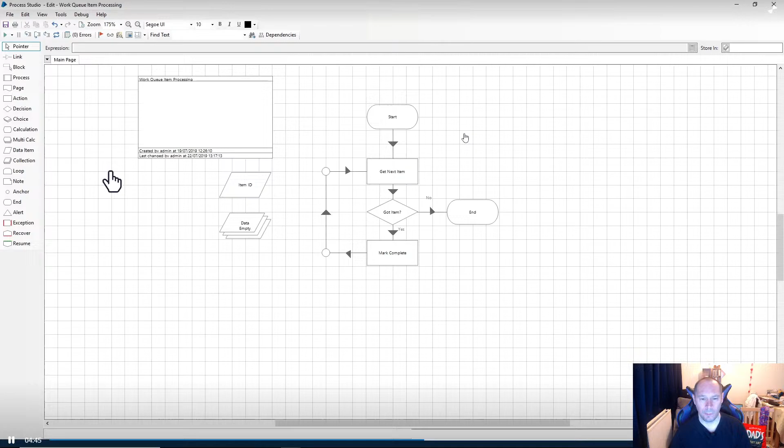Next, you will modify the work queue item processing process to work the new items in your work queue and mark the items as either complete or as exceptions.

In this activity, the exceptions will be business exceptions, as some decision logic will need to be constructed around the full-time flag value in the data collection, with full-time being marked as complete and part-time being marked as exceptions. Remember to use dot notation when using collections in expressions. Save and run.

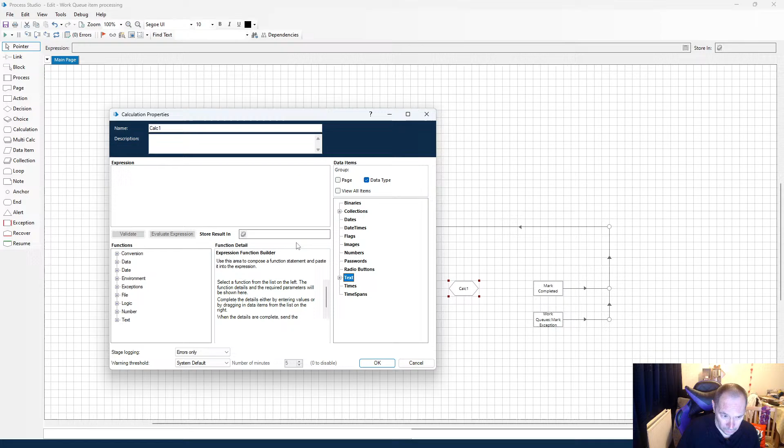Calculation stage and a data item. So I think you only need to populate the one and then we can copy the other, that's basically what that is. It's going to be the dot notation thing again, isn't it? The calculation stage will...

There you go. Update summary field: this item was processed at, and now. So that is just text. Not quite sure why there's a space there, but, and now.

So calculation, update summary field. No, it's not, it's a capture now.

Capture time, I'm going to put capture time just because if somebody else was looking at it. Capture time, item was processed. Then it's... what did they put? This item has been processed at. So I'm not going to bother with that, I'm just going to put item processed at.

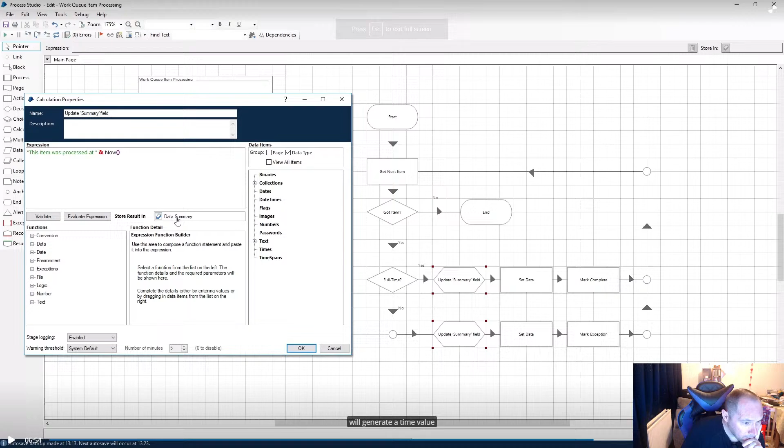Store results in. Really? You're not going to let me store one? Why? Why are you not going to let me store? I don't need you because you're doing nothing. And now that's storing in data.summary.

But where is my data.summary there? Ah, I wonder if it's just a drag there. I wonder if you do that. Where's that coming from? Data, no, it's not that. Collections data dot summary.

Cannot create data stage with the chosen name. Data item must not contain the full stop character. Data summary, there we go.

Okay, so what would that give? The expression, so item process, there you go. So that's the result, okay, so that is working. Fairy schnuff, so that's fine.

Generate a time value and store it in the summary field in the collection. Hang on, action stage. Data, see, no, so that didn't work for me I don't think. The calculation stage. See, generate data.summary and store it in the summary field in the collection. Yeah, so in the collection. So why didn't that do that for me?

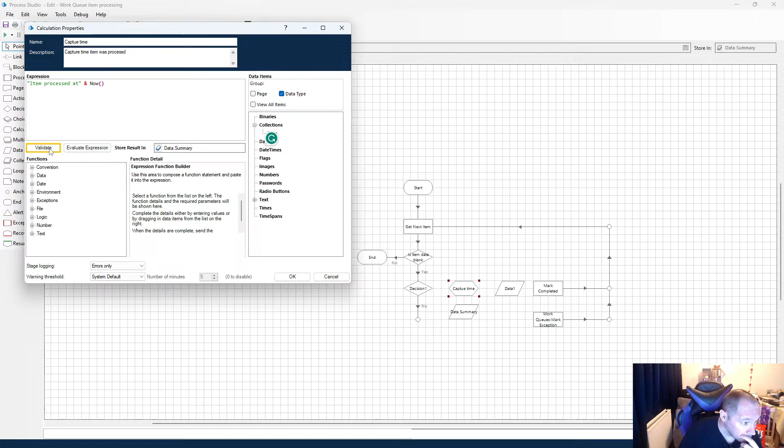So if we got here, so capture here. So if we get rid of this and go to the collection, data dot summary. What? So I just did that and it says you can't do a full stop. Like, what the fudge?

So now I'm going to copy that, so let me just delete that data summary there, so I can copy that, paste that into there, because that's basically the same thing, you know what I mean? So now we can link that into there and that into there, because that is the same thing.

And I think this data item here, its data type is a date and time, and is coming from... it's coming from data type. So where's my input here? Initial value is... can I see, how do I just drag the data dot summary now? Reset initial value, current value.

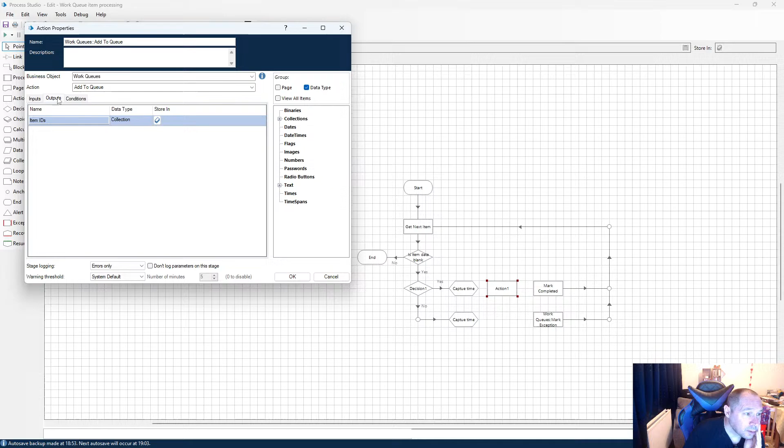Ooh, excuse me, let's have a look. Updates are saved back to the work queue. Whoa, I missed that.

The action stage will ensure that these item updates are saved back to the work queue. The set, so data and item data action, it's set data, look. The work queue's business object will save each update of the collection back to the work queue.

Set data, so update field, set data. Business object will save so data and item data. See, do you know what? Let's have a look, so I don't know.

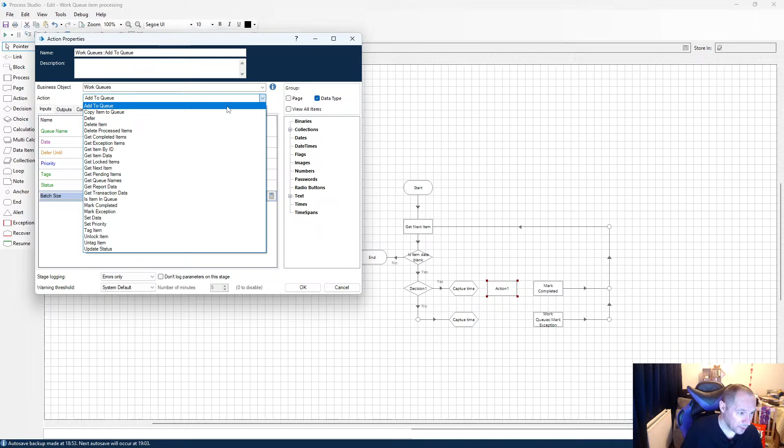So action was update the work queue, wasn't it? So it was a work queue, and then it was update status, and then it was item ID? Yes, it was just item ID, wasn't it? Done. So if we do that, paste that, because it's updating the same thing. There's no point in reinventing the wheel there.

Of course it does, because it uploads to the data, that's where it's going, data.summary. So that's how it knows the field that it's updating.

Within the collections, god dang it. That is not necessarily clunky, but that isn't intuitive at all, I don't think. Save each update of the collection back to the work queue.

How you doing, G? Good to see you, brother.

That is clunky, man. After running the process, these updates will be visible in the session log. Where? Update summary field, ah, there you go. Well, there's only one way to do it, isn't there?

Let's have a look, I don't think there is. Damn, that's harsh. So let's reset that. Let's run. If you go straight to no, I'm going to be a stinker. Here we go, so let's see if it works.

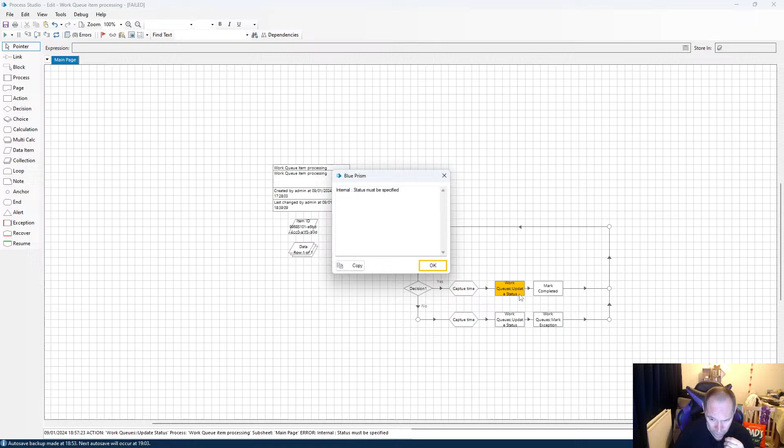Internal status must be specified. So my internal is wrong. So my internal is...

What did I do wrong? Clearly I've done something wrong there. Damn it!

Data, where's this data coming from? Data and item, so where's the data coming from? Data and item ID, where's the data coming from? Because that's not what we're setting, and we're definitely not setting that here.

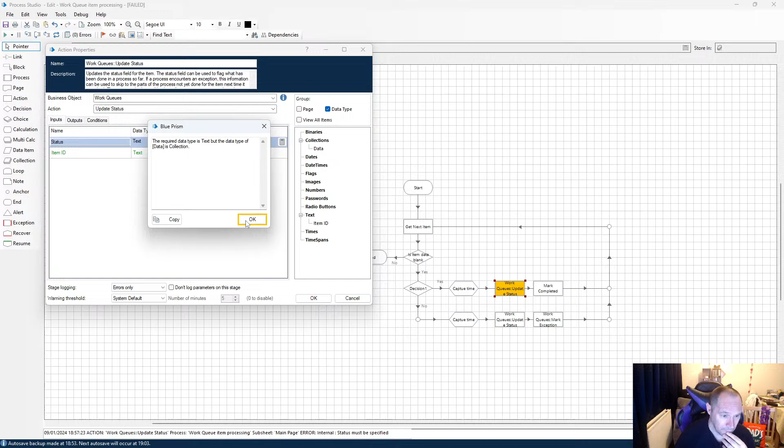Oh, now it works, god dang it. Out of the way, Grammarly. Because that's not going to get old.

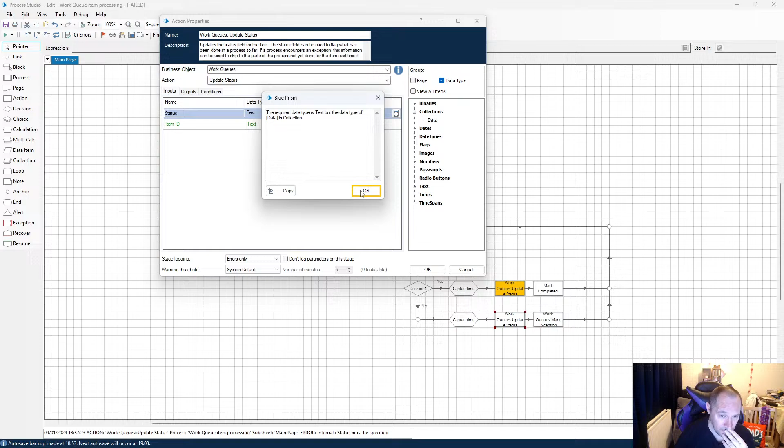The required data is text, but the data type of the data is collection. Oh, is that changed up here then? Did she change that in here? She has, look. Oh, you tart.

And it's there telling me as well, that's the worst thing about it. It's absolutely telling me.

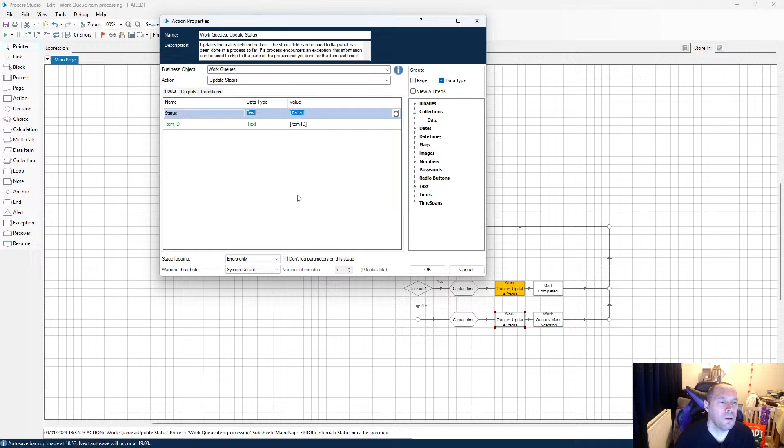So hang on, I'm missing something here. I've got to be missing something here. Ensure that, hang on, data is collection and item ID. So, oh okay, so I think I need to add another one, or remove my data.

Ah, I don't have a data, so I need to add another one. That's why. I think that's what that's trying to tell me to do.

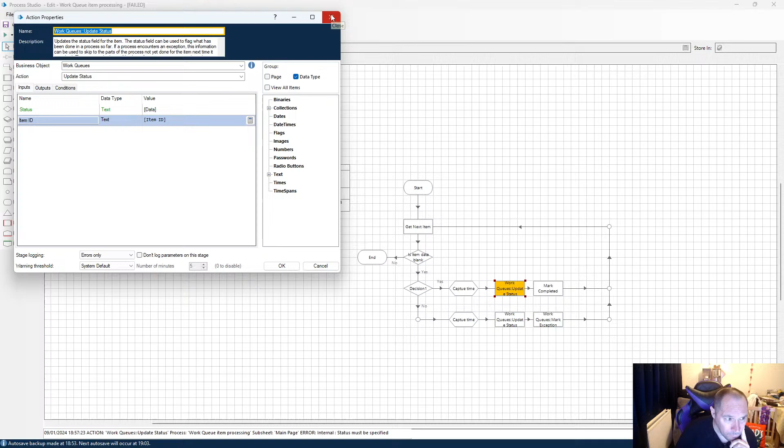Clearly I've got that wrong somewhere. I must have. It's not a data item, it's an action item. So it's an action item, input, so it's a work queue, update status

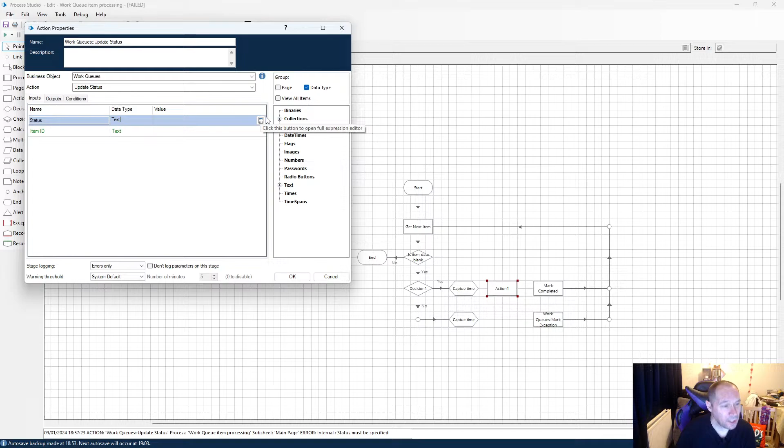as a text, but why? Why are you updating as a text? How do I update you as a collection? Or can I just drag and drop that? No.

How you doing, G? The required data type is text, but the data type of the data is collection. Yeah, I get that, but how do I swap it? Because it says text.

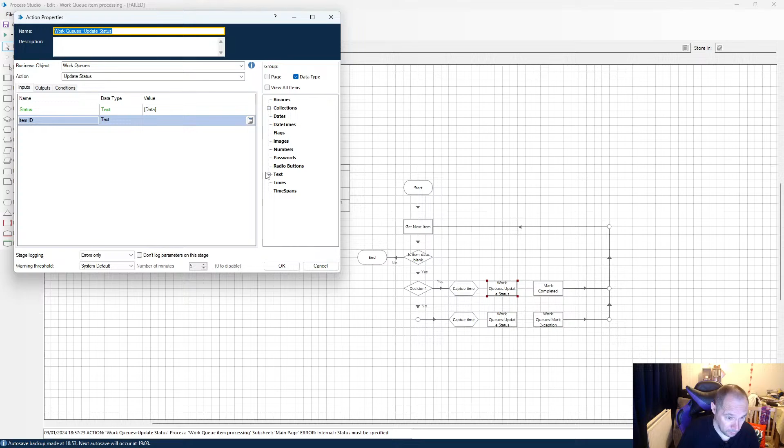Conditions. And data is fine, and that is data. Item ID, okay, and of course you need to be item ID as well. So why are

you not doing that? Current date and time is data.summary. So data.summary, storing data there, dot summary.

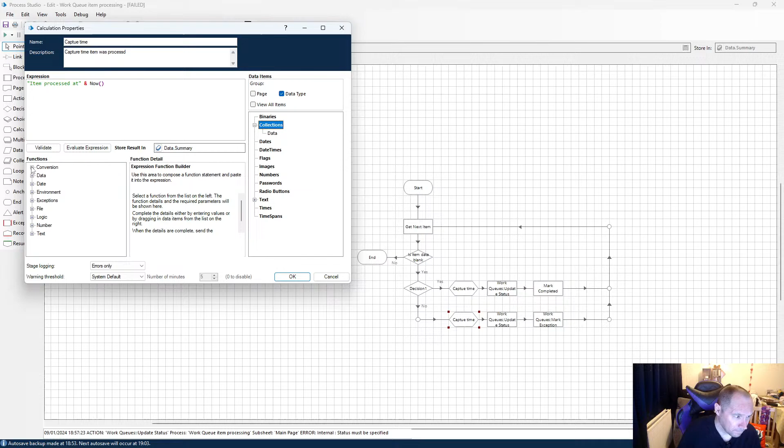What happens if I copy that? What happens if I copy that and then bring this over to here and then see what it says here, data? What if I do that?

Well, it works, but I can't.

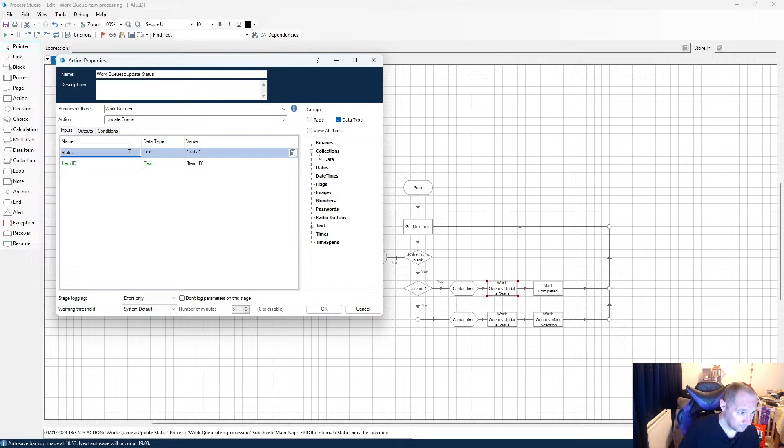Okay, so what am I missing here? Because clearly I'm bloody missing something. Right, back to this, that these item updates are saved back to the work queue.

So action properties is set data, work queue, set data. Oh, set data, not update data. Ah. Set data.

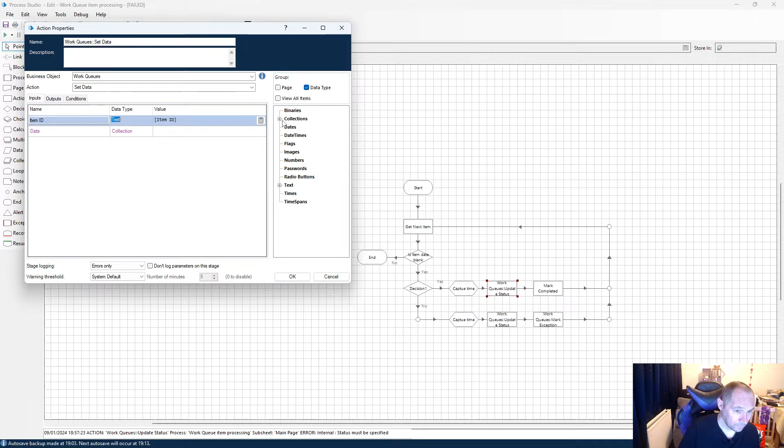Wrong one, my old mucker. Wrong bloody one. You okay? Good luck for tomorrow, my brother. No, actually it's Thursday. Good luck for Thursday. I've lost days, dude. I've lost days.

Right, let's have a look. So that collection is data and item data. Collection is data and item data. So collection, let's go back. Oh, hang on, she just dropped. Summary field in the collection. Okay, we need that one. That's fine.

The action stage will ensure that these items. So the text is item data, collection is data. So the text is item data. So the text is item data, collection is data.

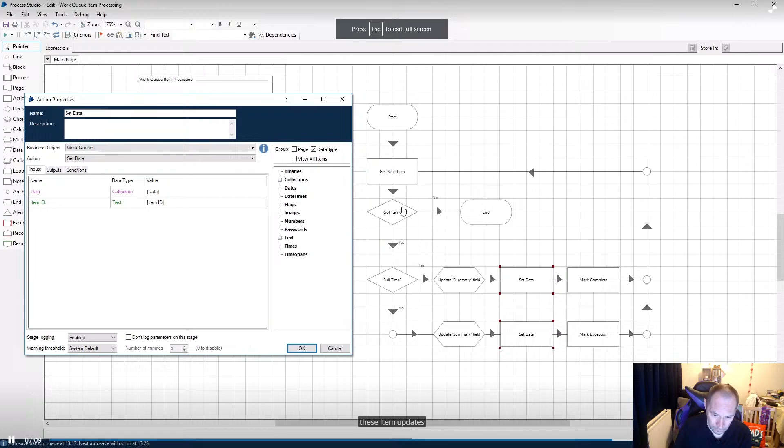Updates are saved back to the work queue. The set data action in the work queue's business object will save each update of the collection back to the work queue.

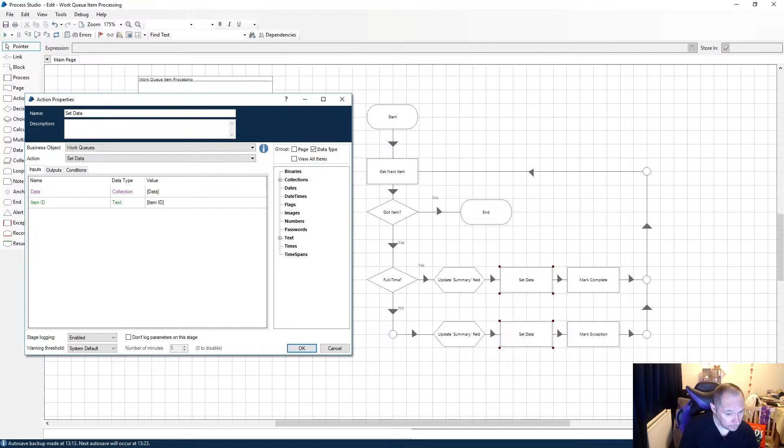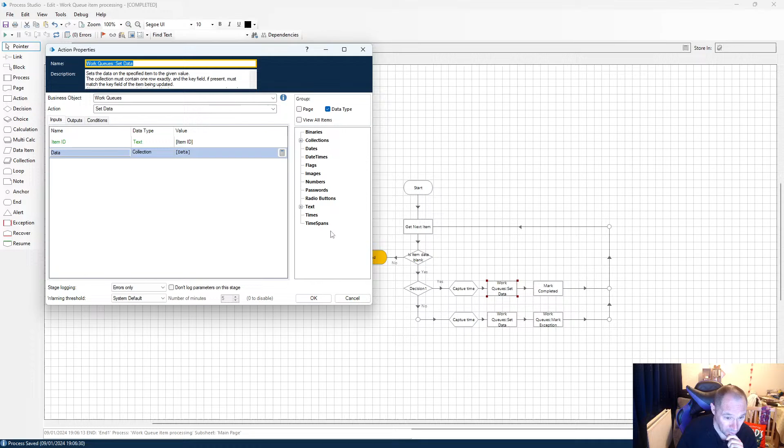Yeah, I'm not necessarily a fan of that at all. So it's basically the calculation stage to capture the time, that then goes over to here, sets that in the work queue on the item ID that it's functioning on, and then it marks it as complete in the item ID. I mean, that to me is kind of not basic. That's not basic RPA, that is kind of more advanced stuff, I think. I think that's developer rather than associate developer, if I'm honest.

After running the process, these updates will be visible in the session log. So updates will be visible in the session log. So let's close this now. Save changes, updated to capture process time. Save changes and close. Into Blue Prism, into the control panel, Queue2, and then view log.

Did I miss something here? Work queue, updated status, decision. Ah, there you go. Last updated, completed. Yeah, not a fan of that. Mind blown. Update summary field. Did we see that? The update summary field.

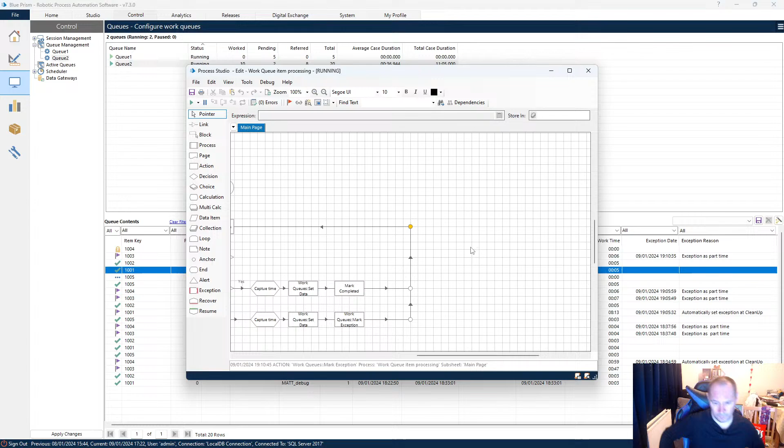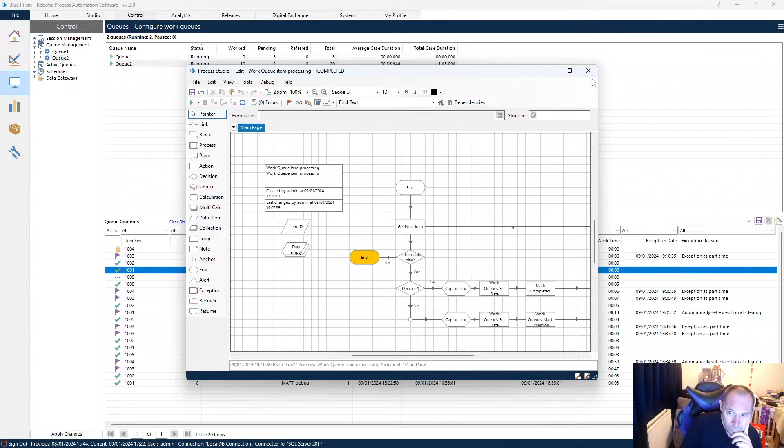Sweet. Let me just refresh that. Refresh and view log. I don't see that. Why do I not see that? Can I open this? I can open this. So that ain't doing anything, is it? Either that ain't doing anything or I've set that up wrong. Because clearly that isn't working, is it?

I don't like that. Because it's worked, but it hasn't worked. In my mind, that hasn't worked. New items can be deferred to control the day and time.

Right, stand by, because I want to do... So work queue item generation. Add to the work queue. Work queue 2. Batch size. Where did batch size come from?

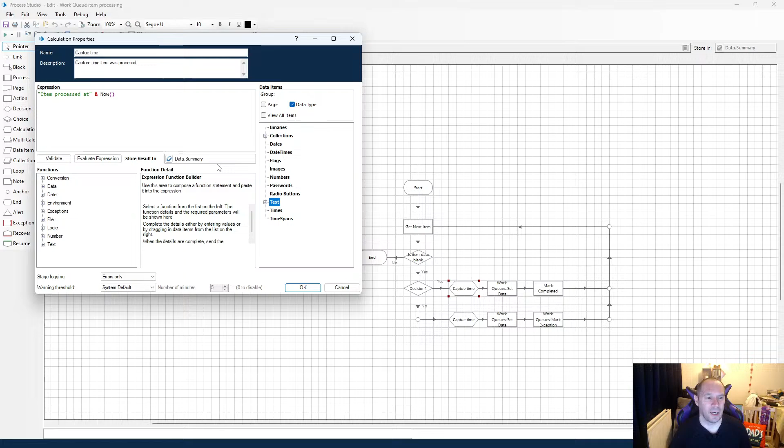So work queue item processing, which goes over to here. So this goes, the item processed at now. So the item is processed now, which gives us a date and time. So the expression gives us a date and time as a text. That text is passed back into data.summary, which brings it back up to here into data.summary. So this then sets item as item ID and the collection as data.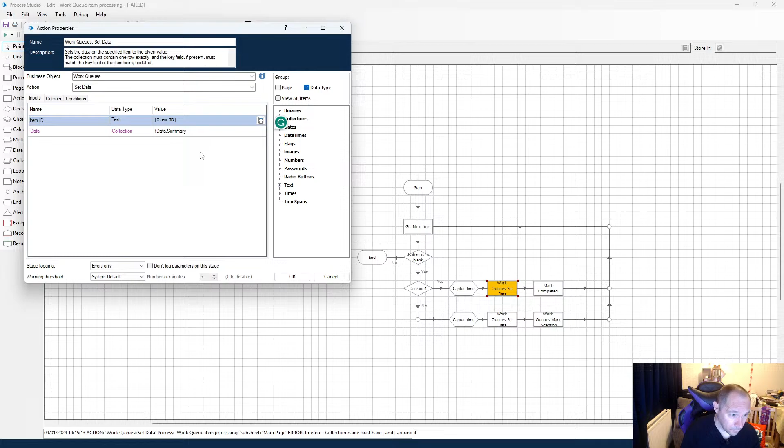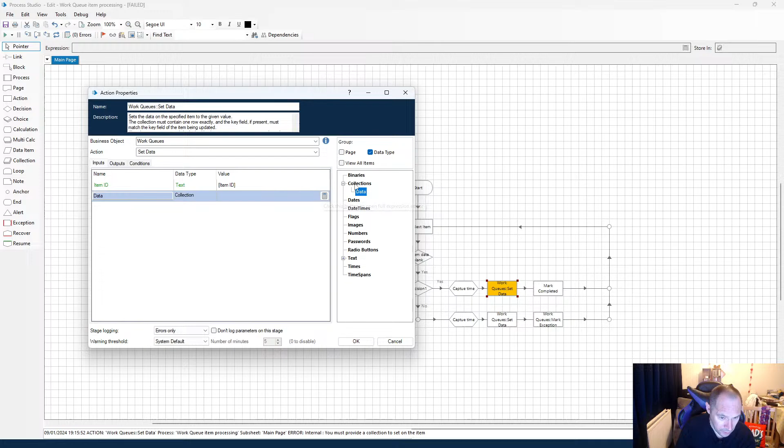Let's try that. You must provide a collection to set to the item, which I did. So data, C dot summary. That to me is the biscuits there, you know what I mean? Same there. So if I get rid of that and bring in the data, and then put dot summary.

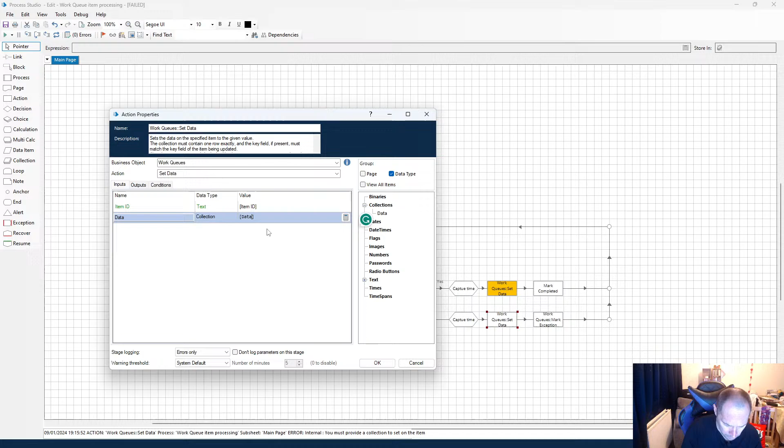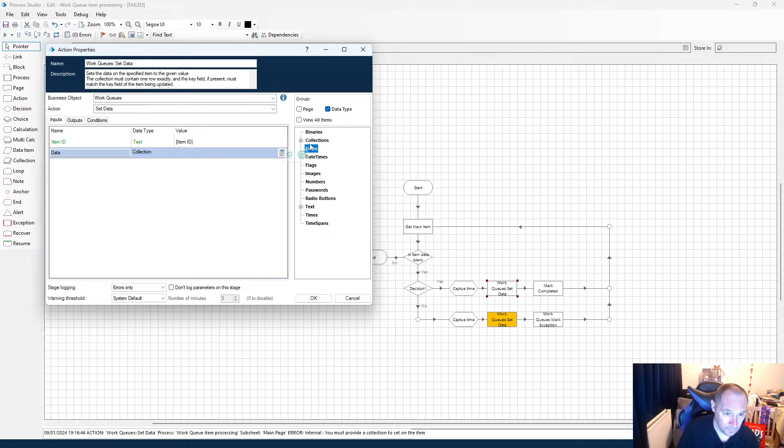I'm just trying something here. If it works, that's great, if it doesn't, that's fine. But it doesn't seem to be updating to me. No, okay, so that just doesn't want to play then. That's fine. So that's data, and that is data.

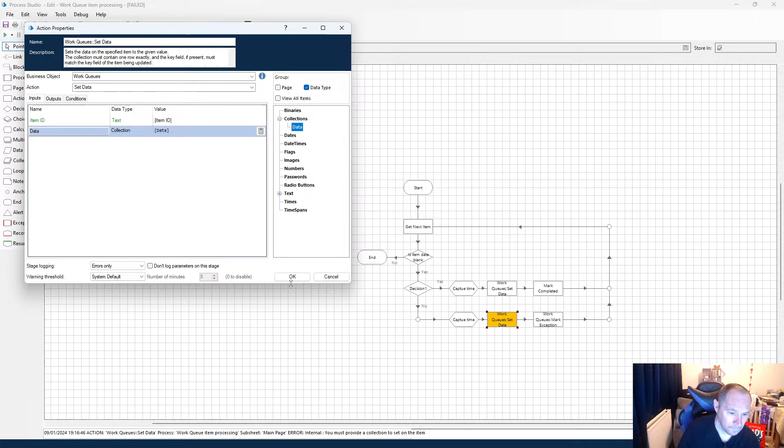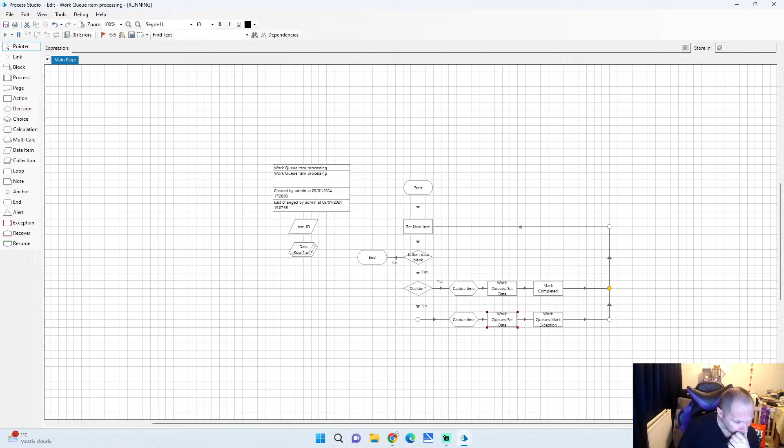Yes, okay, that's fine. I'm still not convinced that that's working like it's supposed to be doing now, at all, actually. Unless, of course, I'm just missing something, or unless I've just got it wrong. In which case, that's not too bad.

So 12 running, referred, total 25. So that's Q1, that's Q2. Let's just refresh that. Select all, can we clear this now? Delete work cases. There we go. Right, so let's go, that's a fresh work queue now from work queue 2.

Close, testing. Save and close. And studio work queue generation, please. Play. Done. To work queue processing. Run.

Over to control, work queue. Yeah, so this is working through it, okay. And it does show, see, it shows a completed on here, which I don't know whether that's what I'm supposed to be doing, but it's not what I saw on that log. So there's an exception there, which is good because there's the exception reason, which is part-time. So we know that is fine. So that's working as it should do.

Finally, you will configure your process to defer an item whilst it is being worked. In the work queue item processing, change the Mark Completed action to defer. Enter an expression for the until input parameter, similar to the expression you set in the Add to Queue action previously.

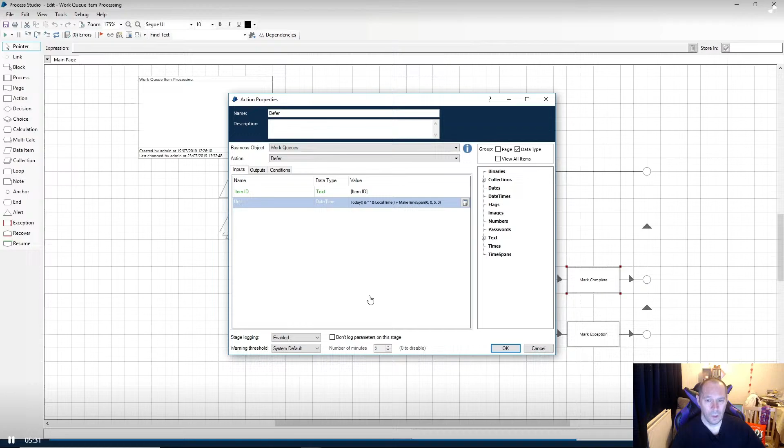So I'm not going to do that. I just think that's far too advanced for a foundation course. The foundation course is for basic knowledge. You shouldn't be gluing things together at this level. Deferred, date, times, and 5 minutes into the future. So get date, get time, and then defer by 5 minutes. You shouldn't be doing that at this level.

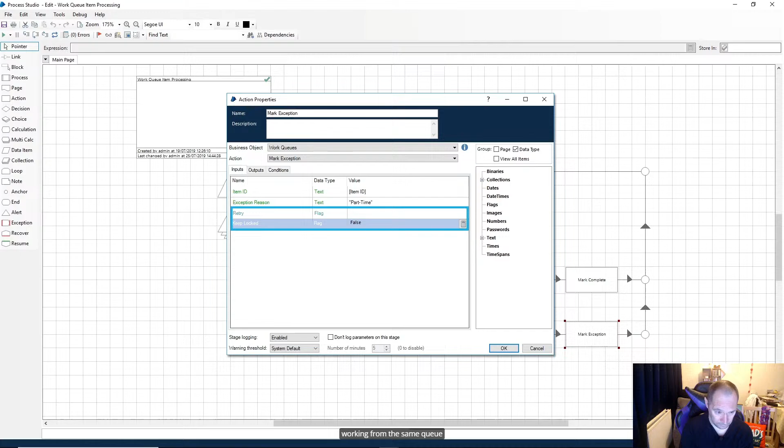When keep locked is true, the new cloned item will instantly lock. The process will have control of this new item and can continue working. When keep locked is false, any new item that is created is freely available for any Blue Prism process working from the same queue to pick up as the next item.

Well, isn't that just dandy? I like that though, it's very good.

Okay, I think that's it. Yeah, that's it, we are donezo, baby. We are donezo, donezo, donezo. So additional features will be for the next one, I think. Let's call that there. So I like the work queues.

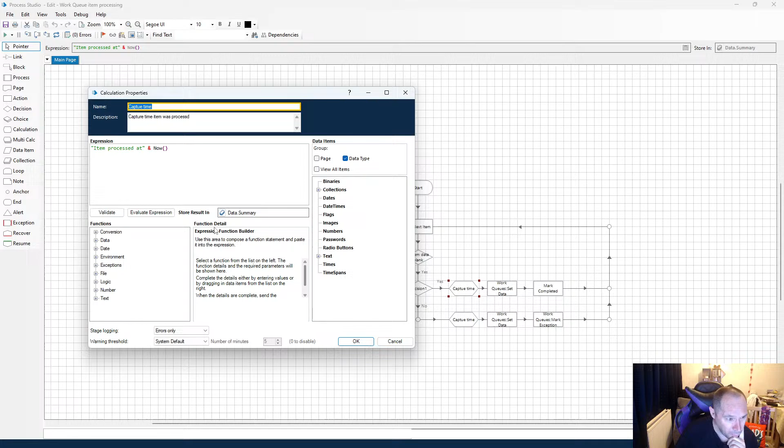I like probably the first 9 to 10 sections of that. After that, I'm just not a fan. Work queue update, so I'm not a fan of this either. The capture date and time stuff, I'm not necessarily a fan of. I'm always tempted to kind of remove that and just say, because, what's the point? It's captured anyway. So why do I necessarily need that? And it's not functioning for me or working anyway, I don't think. But it is as it is.

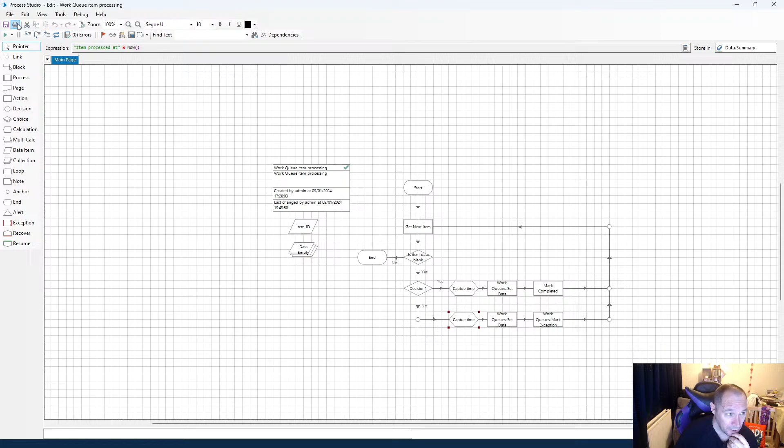Right, I can close that because we didn't make any changes.